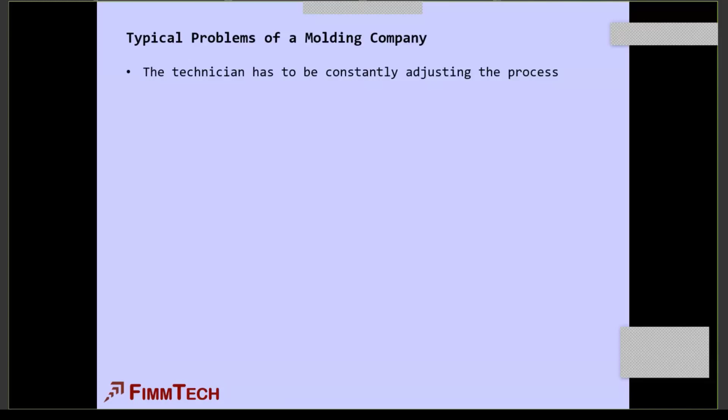Technicians constantly adjust the molding process. Parts have to get sorted out at the machine, sorted out by cavity. Don't tell me you guys don't know this. Sometimes cavity 4 is the one that's bad, so you have to sort it and throw it away. Measurement frequency is very high. Possible customer returns affect your reputation. You have to rerun the parts. Tool engineers get frustrated because they have to add steel to the tool.

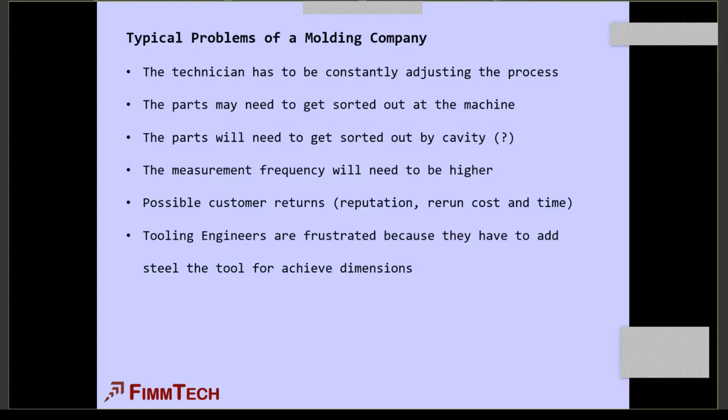These are only some of the problems. They had the tool done correctly, but then you said no, this part is now too big. So they change the steel, but then you have to go back and weld it. Some typical things: parts were good, CPKs are acceptable during qualification. So you qualified the mold, fantastic, 1.67 CPK. Now you go into production, and the CPK is like 0.97. What happened here? So all these things are typical problems on the production floor.

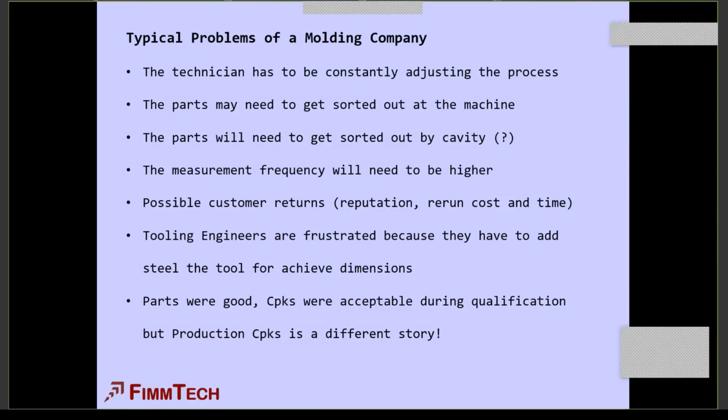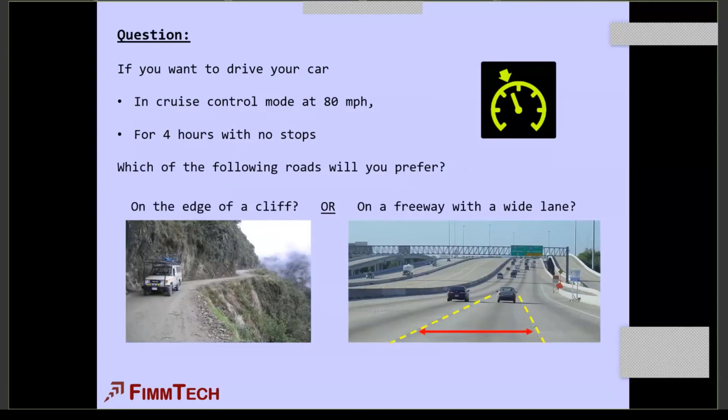Simple question: if you want to drive your car in cruise control mode at 80 miles an hour with no stops for 4 hours, which of these roads would you prefer? The answer is very simple. Do you want to drive on the edge of a cliff, or do you want a nice wide freeway like this? Of course the answer is obvious. You need a nice wide freeway so you can have carefree driving.

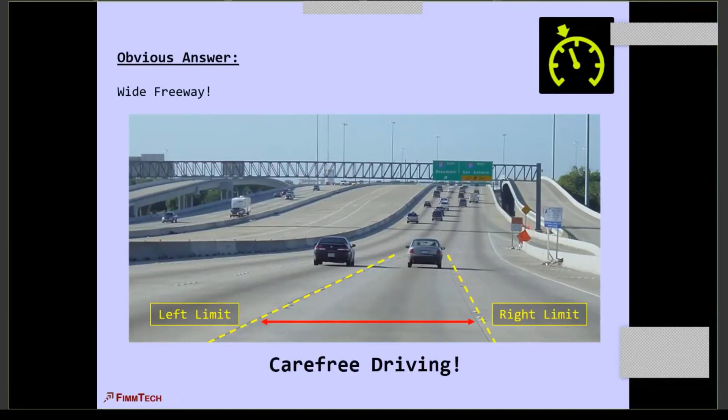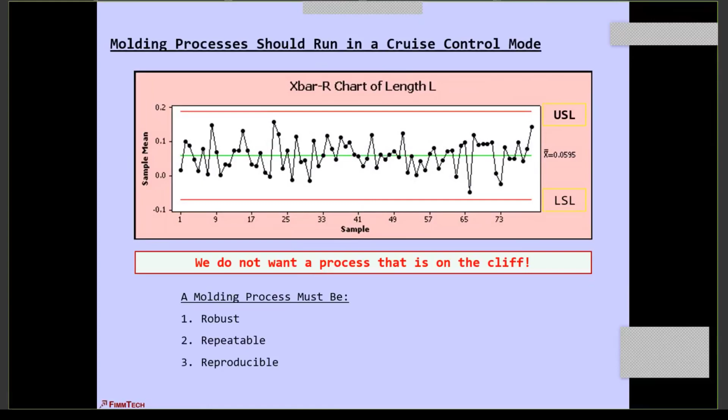There's your left limit, right limit. You get a phone call, you want to drink water or something, you waver a little bit, you're still going to be okay. So the choice is always having a nice wide freeway for cruise control, and I say molding processes should also run under cruise control mode and have a nice wide freeway. We do not want a process that's at the edge of a cliff. Therefore molding processes must be robust, repeatable, and reproducible. All three R's are extremely important.

Now, having said that, if the process is on the cliff, you're going to see all those problems we talked about. So robustness is one thing I mentioned, the process should be robust. That means the process should produce all the parts under normal variations in the production environment.

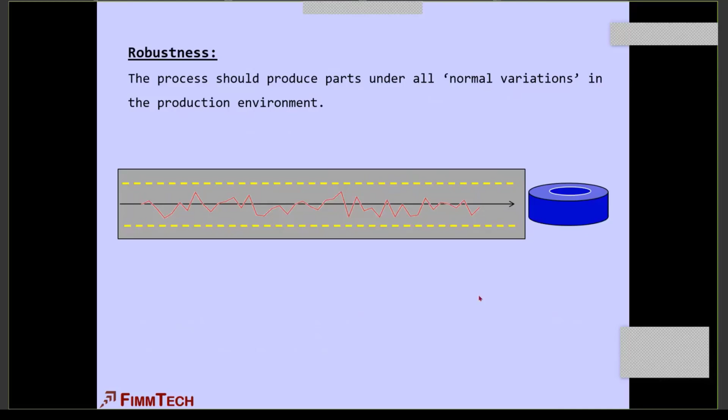If you look at what it takes to mold a part, there's a certain path to that. Each of these things is going to have variations coming from different locations, the machine, the personnel, the process, and all these things. Each of them are going to have their own fishbone diagrams. There's going to be variation in process, variation in the measurement systems - that's why you do gauge R&R - and variation in the viscosity of the material. So all these things are going to happen, and they're all going to have their own fishbone diagrams.

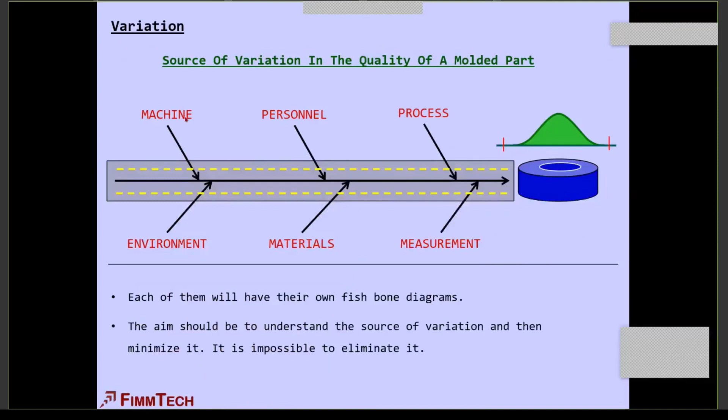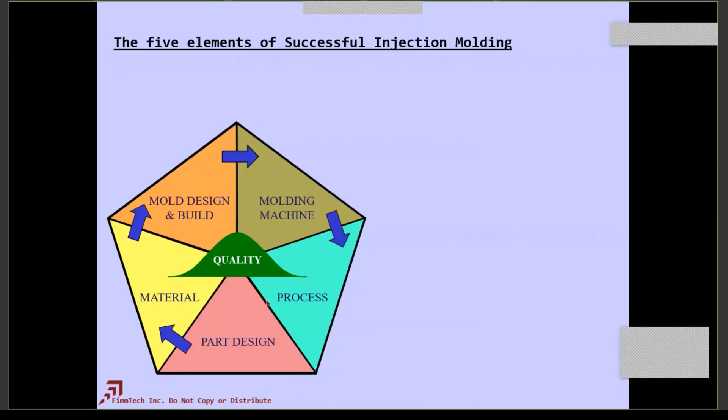Now, apart from this variation, please also remember that to come up with a good molding process, there are 5 elements that are important: part design, the material, the mold design and build, the molding machine, and last is the molding process. All these elements are pre-production or pre-molding, and they're also important. It's like a relay race - all the runners in the team have to run fast enough to win the race. This is very important to know.

So if you look at the aim of a molding operation, what do you want to do? You want to mold parts consistently. You want to mold all the parts that meet all the quality requirements, and you want to run an efficient process.

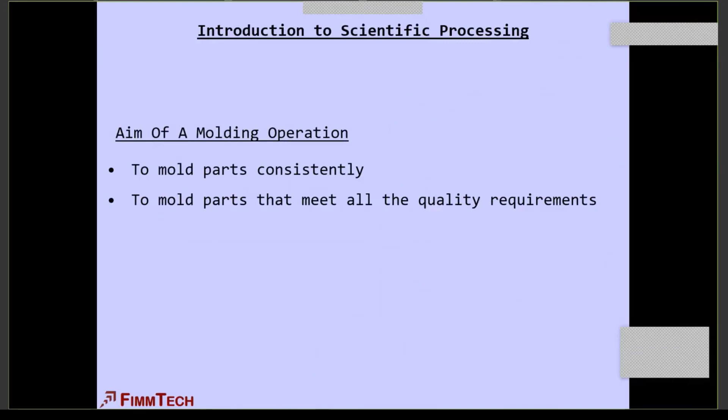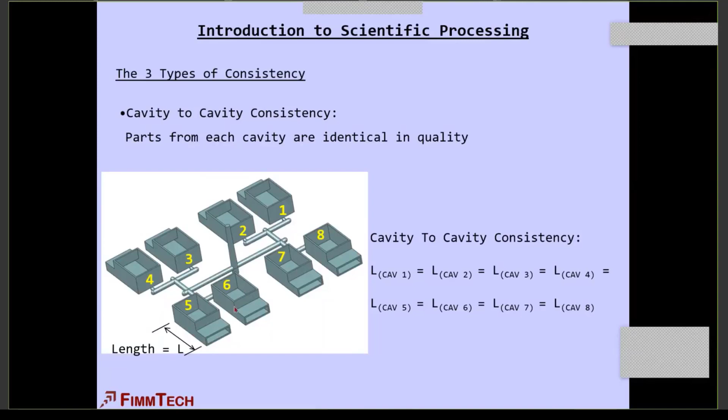Consistency - there are 3 types. The first one is cavity to cavity consistency. Second is shot to shot consistency, meaning every shot has the same dimension. And then you've got run to run consistency.

That means you mold 100,000 parts, change the mold to something else, then change the mold back to the first mold. If the quality of the parts from this run and that run is the same - meaning the average and the variation in the first run is the same as the average and variation in the second run - then we say you've achieved run-to-run consistency.

This is the most difficult consistency to achieve for a lot of molders. Why? The main reason is the word I used sometime back: robustness. The process was not robust to begin with. It is not repeatable, it's not reproducible.

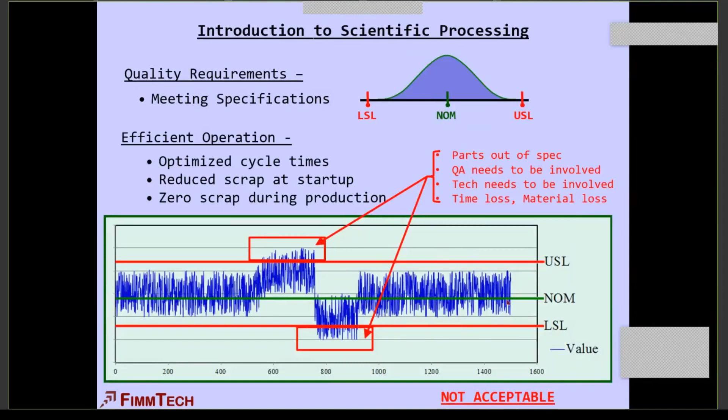Of course, you want to meet all the quality requirements. You want to have a good, efficient operation, and you don't want a process that runs like this. This is where you see a lot of loss in efficiencies, a lot of returns and so on and so forth. So something like this is not acceptable.

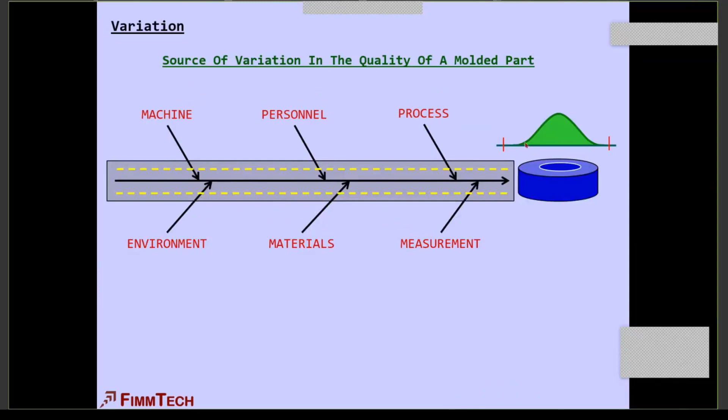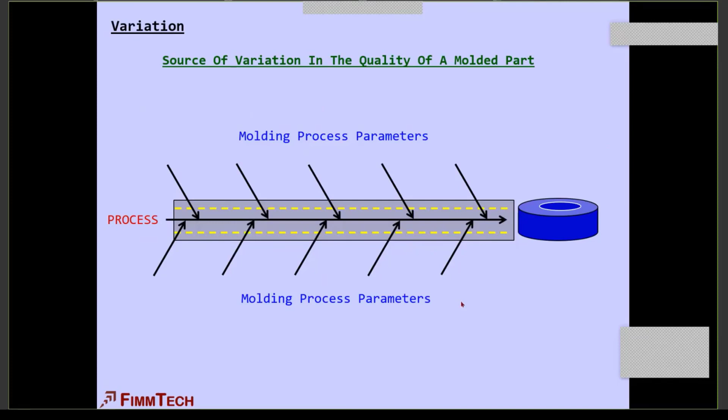So going back to this, the source of variation for a molded process part can come from various locations. However, we are going to focus on the process. So now if you look at the molding process, where is the variation coming from? A number of things, but we are now going to be talking about the process conditions or the molding process parameters. How many are there? I have identified them as 11 plus 2 molding parameters on the machine.

And 8 outputs. So these 11 plus 2 - I don't say 13 - because if you don't split pack and hold into 2, and a lot of companies don't split pack and hold, then you have 11. If you do split them into pack and hold, then you have 13 parameters out there. And decompression is there, it's a question mark. Again, I cover this in my 4-day class, I teach a whole 4-day class about it. So let's not look at this in detail, but I say it's 11 plus 2 molding parameters. Variation in this is going to give you variations in the quality of the molded product.

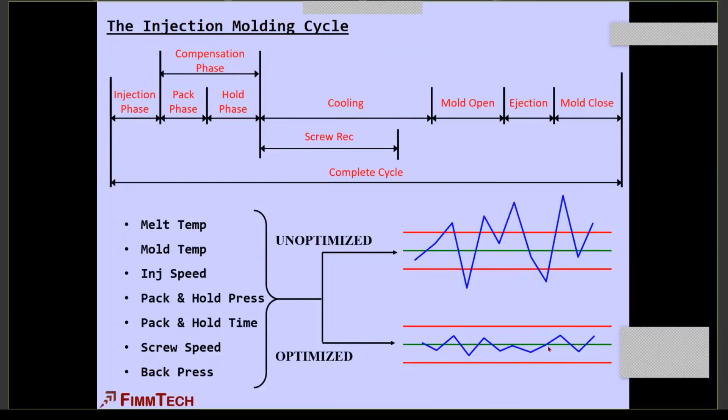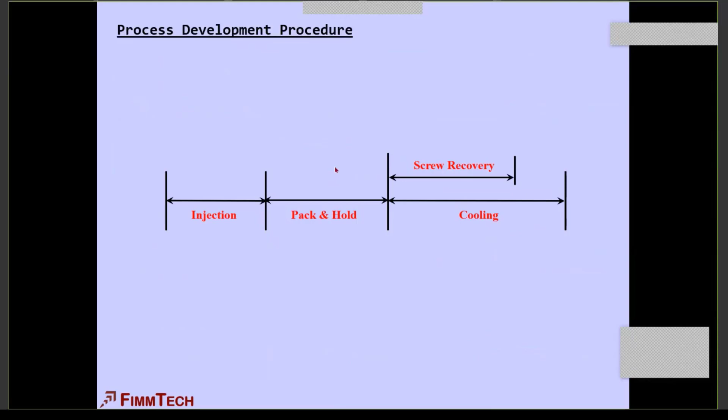What do molders do? The first thing they'll do is the melt preparation studies. I don't know if a lot of people do these things now, but it's something I've been teaching for the last 5-6 years - the melt preparation study.

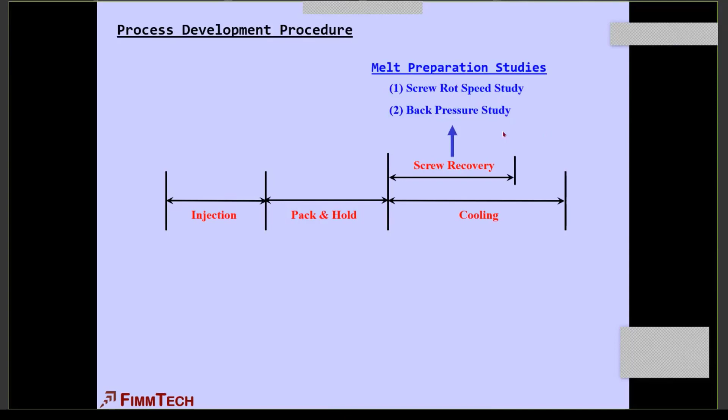So you do melt preparation, screw rotation speed study, a back pressure study for coming up with this part of the cycle. And then you get into the scientific molding side, or what I call the 6-step study. The only reason I call it that is because we know how many steps there are, nothing else.

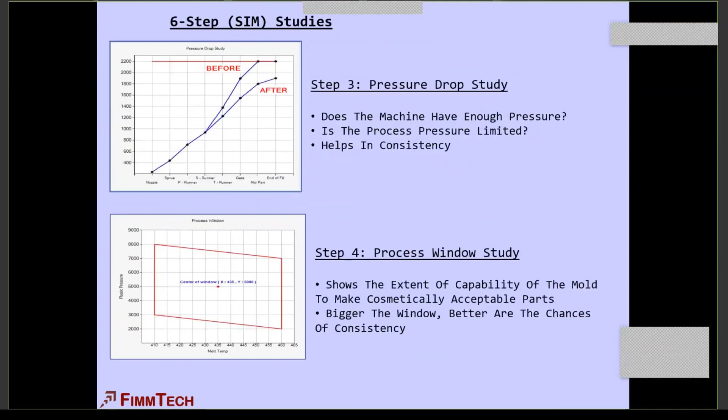The term scientific molding was coined by Mr. John Bozzelli and the folks at RJG. These are the 6 studies. People will do these studies and come up with the process. Here are some graphs from that: melt preparation study, the 6-step studies - viscosity, cavity balance, pressure drop, process window, gate seal study, and cooling study.

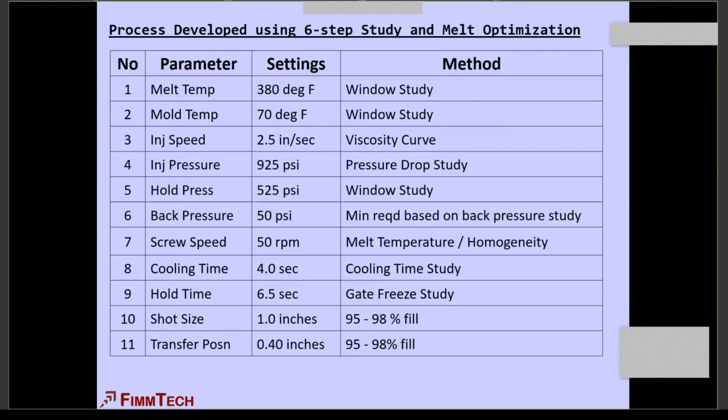So they do these studies and then they come up with the molding process, most companies. So here is the molding process that I've come up with after doing the scientific molding studies. Okay, good, so I have a process. So are we done? The answer is no.

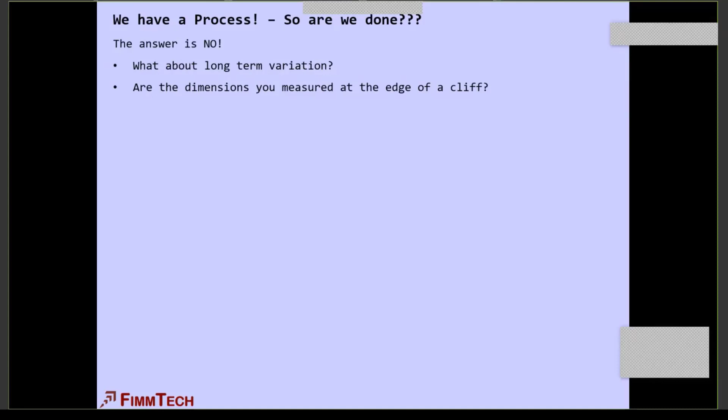Why is that? Because what about long-term variation? Are the dimensions that we measured, where are they - are they on the cliff? A lot of people will do a CPK study right there with the dimensions, but it is flawed because if you take 30 parts back to back and do a statistical analysis, chances are they'll be extremely consistent. But that is not the representation of your complete production run in the future, or the next one that you're going to get. So are the dimensions you measured on a cliff?

Are you going to be fighting dimensions and cosmetics at the same time? I'm going to give you an example of this. Are you setting realistic alarm limits? Alarm limits - very important. You say the cushion value should be plus minus 0.05 inches. Where do you get that 0.05 from? The pressure values should be plus minus 100 psi. Where do you get 100 psi from?

So there has to be some data-driven decisions you need to make, data-driven numbers you need to come up with. If there's a dimensional issue, what should I change out of the 11 plus 2 parameters? As an example, look at this.

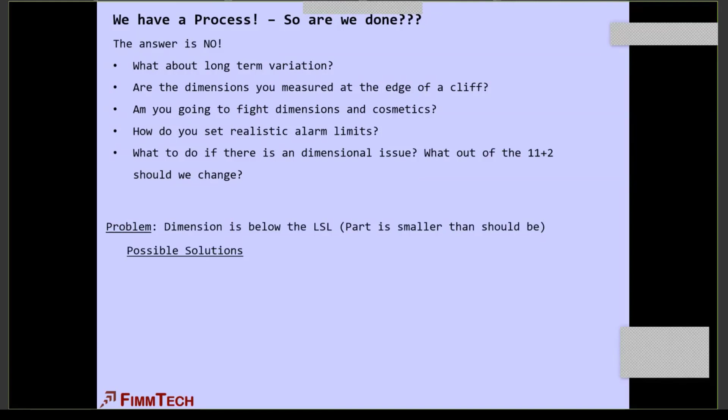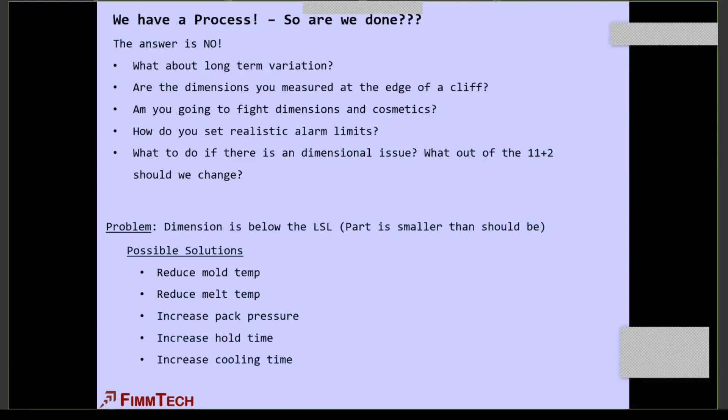The dimensions below the lower spec limit - so if you want to make a part bigger, increase the dimension of the part, then if I say go increase the dimension of the part, what will you do? Possible solutions are: reduce the mold temperature, reduce the melt temperature, increase the pack pressure, increase the hold time, increase the cooling time. All these things will, in theory, increase the dimension of the part.

And therefore we need to understand the effect of the molding parameters on the part quality - which one is going to give you the biggest bang for buck when you go change it. Is it melt temperature or is it mold temperature? There's no definite answer because it is part dependent, dimension dependent, and material dependent. All these answers are correct, but they're all dependent upon the particular things I just told you about.

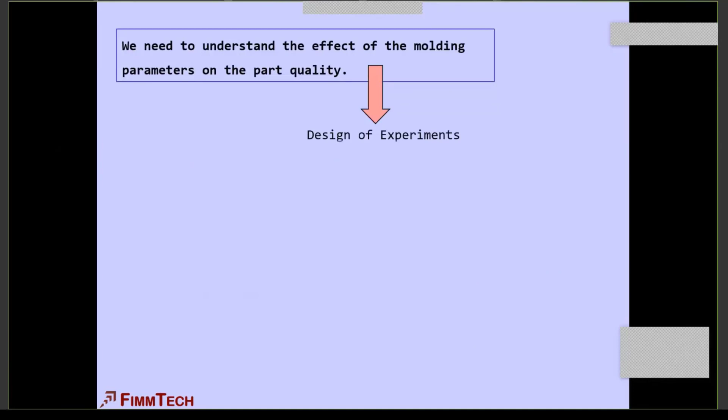So we need to understand the effect of molding parameters on the part quality, and that is what design of experiments is. We play with the process - what do we do? Let me go change the cooling time and see what happens. Let me go change packing pressure and see what happens. So we play with the process.

Playing with the process and systematically finding what the effects are is basically what is called design of experiments. So if you look at a definition, it is a systematic set of experiments that involves changes to factors of the process to study and record the corresponding effect on the responses. So that is what a DOE is.

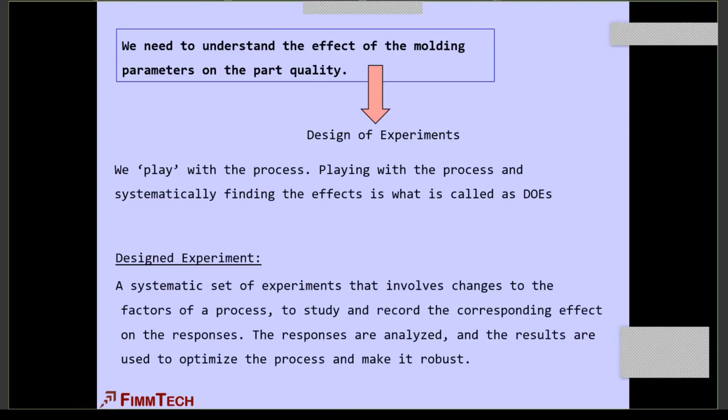And for those of you who have studied DOEs, you probably already know this. Afterwards, there's the first part, then they used it when the war broke out - they started using it in the war to increase yields and all that stuff. And then you got into Mr. Deming, who started implementing the quality systems and all that. And now, of course, we are using it more and more.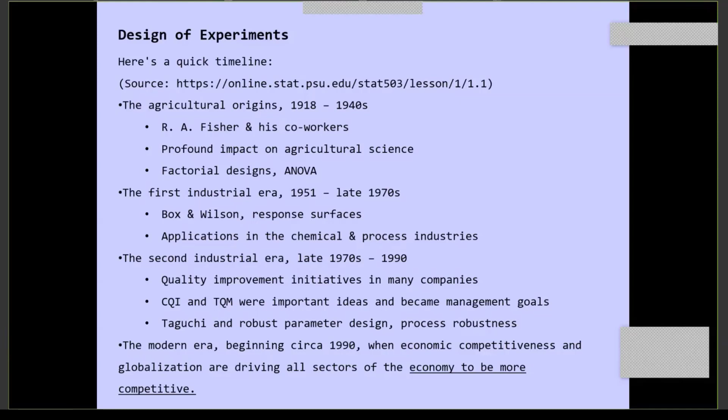One of the reasons the COVID vaccine is getting delayed is not because they're not able to make it, but the testing is going to take a long time. How do they test it? They go through a lot of DOEs. They have to go through a lot of factors, a lot of variation, underlying conditions and all that stuff. So DOEs have been used in several industries.

My favorite wine is the Meiomi Pinot Noir. So if any of you all want to send me a gift, that's what you need to send me.

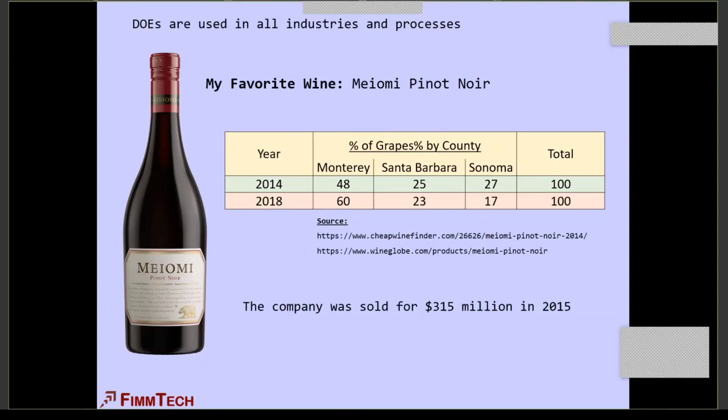If you look at this wine in 2014 and 2018, I got this from the websites. You can see that they're all blended differently from different grapes. Why did they do that? In order to maintain the consistency of the taste. Once you have that consistency, once people start liking that taste, they need to keep on maintaining it, and that's what gives them success. In fact, when I was doing this research, I found that the company sold just one brand of wine for $315 million. So that's a lot of money. But they use this in the wine industry, food industry, everywhere.

So why don't molders use DOE so often if it's so useful? Because of the misconceptions. Number one, they say it's too complicated, that one needs to understand math and statistics. Then they say it takes a lot of time to perform these studies, there's a lot of waste of material and resources, and it takes a lot of time to measure all the cavities, all the dimensions, or all the runs.

Then I need to learn how to use software and interpret the results. Minitab is a fantastic software, and if you guys know how to use it, more power to you. But I always say, for what we want to do, it's like taking an airplane to the grocery store. You want to go to the grocery store, you don't need to go by airplane. It's just like that. So use something simple.

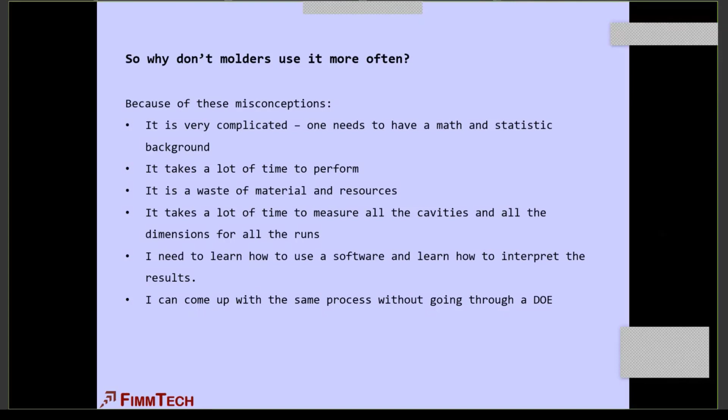Then other people say, I don't need to do all these DOEs because I can come up with the same process without a DOE. Okay, you can come up with the same process, but there are a lot of other benefits that you get, which I'll talk about very soon. So for all these reasons, people don't do DOEs.

So let's go into molding now. Effect of packing - if I want to study the effect of packing pressure, if I increase the packing pressure from 4,000 psi to 8,000 psi, the dimension goes from 1.726 to 1.735. What does this mean? An increase or decrease in the packing pressure by 4,000 psi increases or decreases length by nine thousandths of an inch.

So what did we do here? We systematically performed two experiments, one at low pressure and one at high pressure, and looked at the dimensions and plotted the results. This is a dotted line because this relationship can be anything - there's always a curvature there. If I have time we can talk about it, especially in molding, because there's always a physical limitation to the tool. You cannot keep on packing it and expect dimensions to keep increasing. So this relationship can be anything.

So what have we done? We have done two experiments, one low and one high. But I say this is the most basic DOE, because you've systematically done these experiments.

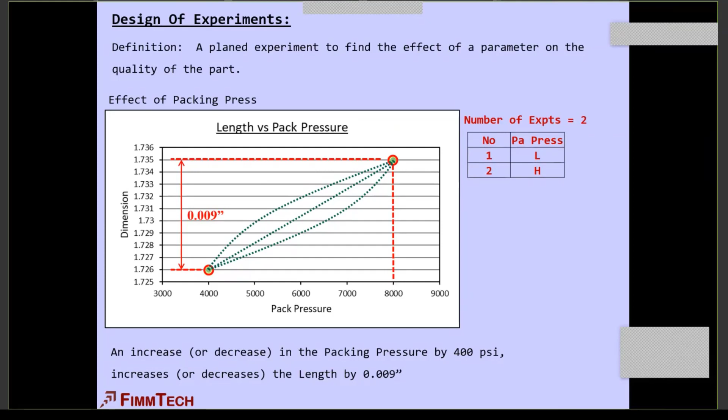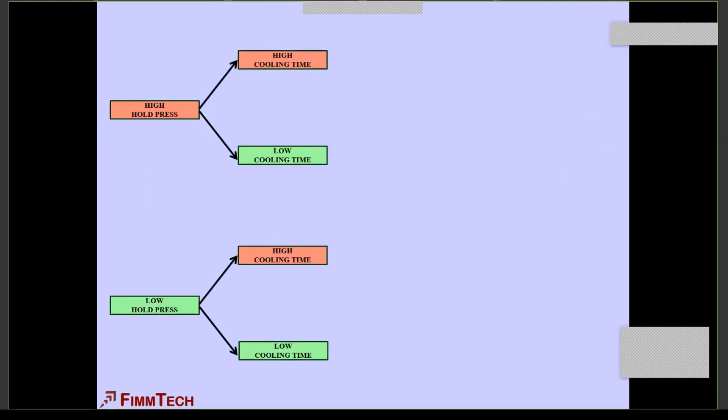Then I say I want to also look at the effect of melt temperature on this. I did packing pressure first, so I did melt temperature second. So what do I do? I repeat the same high and low experiment at the high and low melt temperature, so I end up with 4 experiments. Then I say I want to add mold temperature, so now I add another 4 experiments because I'm repeating the same 4 at the high and low of the other one. So I end up with 8 experiments. If I add one more factor, it becomes 16 experiments. So as I keep increasing the number of factors or processing parameters, the number of experiments keeps doubling because I'm studying low and high.

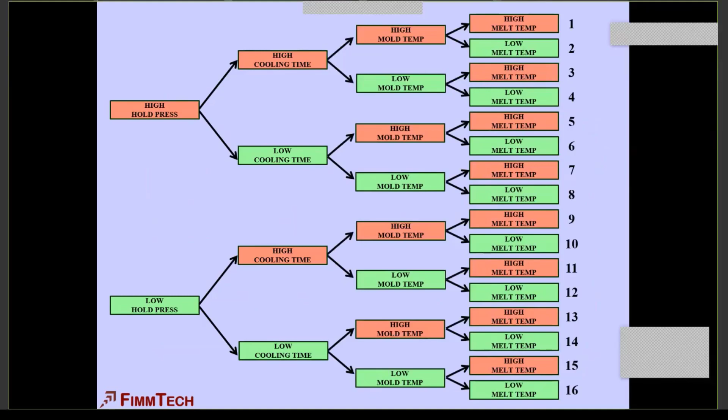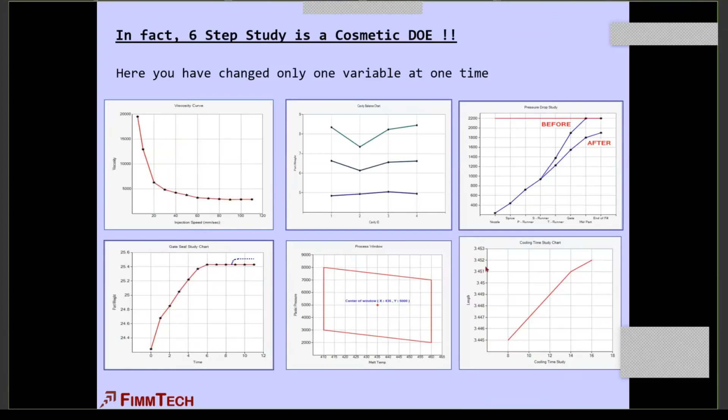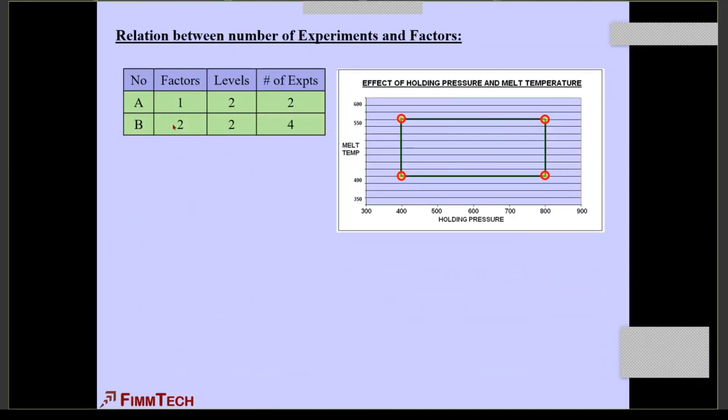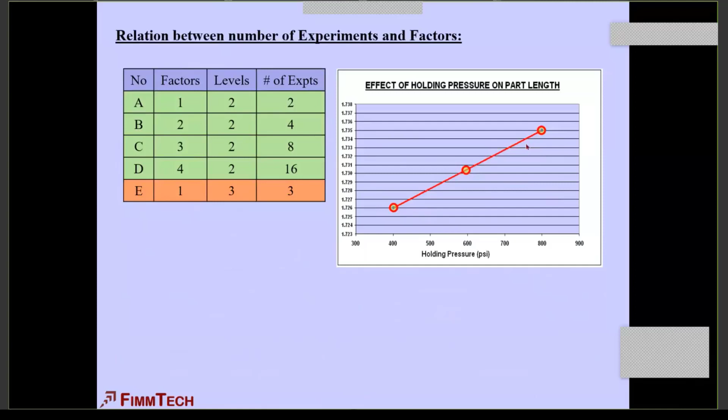But here's the problem: if I've got 1 factor and 2 levels, I end up with 2 experiments. If I go to 2 factors, it becomes 4, then 8, then 16. If I decide 3 levels—low, medium, high—with 1 factor, I get 3 experiments, and with 2 factors, 9 experiments. As you increase this, the number of experiments you need equals the number of levels raised to the number of factors. That's a formula. If you calculate with 13 factors at 2 levels, you end up with 8,192 experiments, and at 3 levels, almost 1.6 million experiments, which is impossible to do.

That's one more reason a lot of people don't do DOEs in industry. They say there are too many factors in injection molding. But there are only 11 plus 2. I've heard people say 30 factors, 40 factors—no, it's just 11 plus 2 factors. If you say there's too many factors, that's one of the reasons people don't do DOEs. But running that many experiments becomes an impossible job.

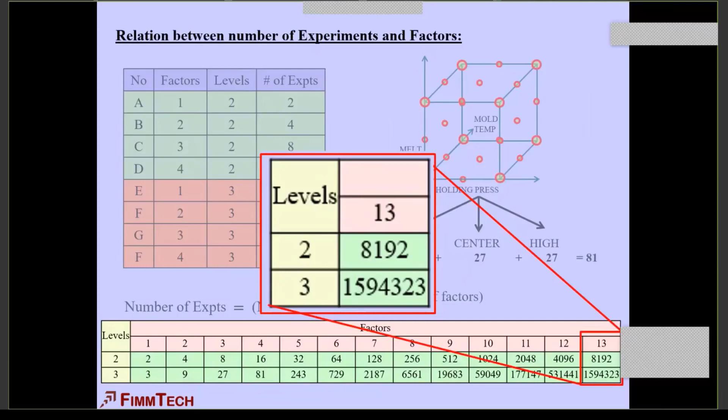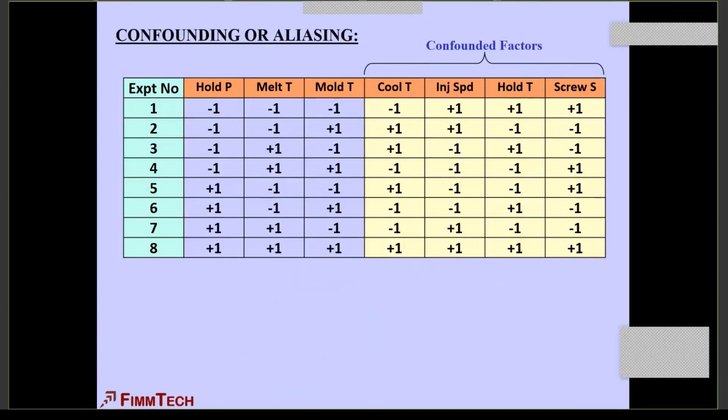So what do you do in that case? I'm not going into details, but this is where our friends the statisticians come in, and people like Ravi who do data analytics come in and say there's something called orthogonal arrays and something called interactions. We take all these things and do confounding, and instead of running 8,000 experiments, you can run just a few, and those few predict the quality of your part. That's what statisticians do. I won't go into details due to time, though I teach some of it in my class, and if you want something detailed, Ravi can come and teach that for you guys too.

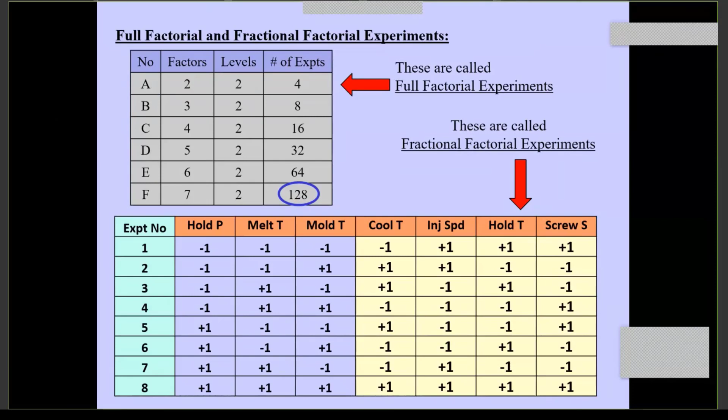They do fractional factorial experiments, and there are several models for DOEs—Fisher methods, the Taguchi methods, and so on. You can do this analysis and come up with the factors that are most important. Minitab is one software you can use, and Nautilus software, which I made very simple, I'm going to show you guys. But then how do you select the factors? I'm sure you're interested in this—how do you select the factors, since I can't run that many experiments.

First, understand the molding side of it—everything comes from the PVT diagram, a pressure-volume-temperature graph. In injection molding, you're taking plastic and melting it—giving it temperature, melting it, then pressurizing it and injecting it into the mold. As it's injected inside the mold, the part is cooling down, so the change in volume is the shrinkage. Anything affecting the PVT is extremely important in your DOEs. Mainly it's pressure, volume, temperature—and volume is related to pressure also. All these things are, of course, related to each other.

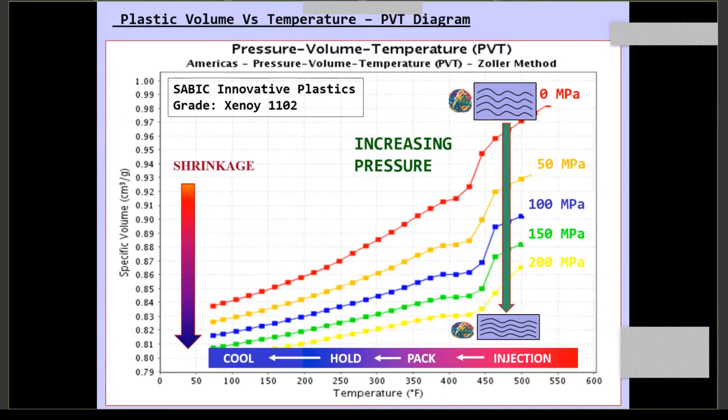Pressure, volume, and temperature are important. When we do our scientific molding studies, we start looking at our 11 plus 2 factors. In this case, I've made only 11 factors to keep it simple, and I've put shot size and transfer together, so you see them as 10 factors here.

How do you select a shot size and transfer position? It's fixed at 95 to 98% fill. So do you use it for DOEs? No, you don't use it for DOEs because you want to keep that percentage fill the same.

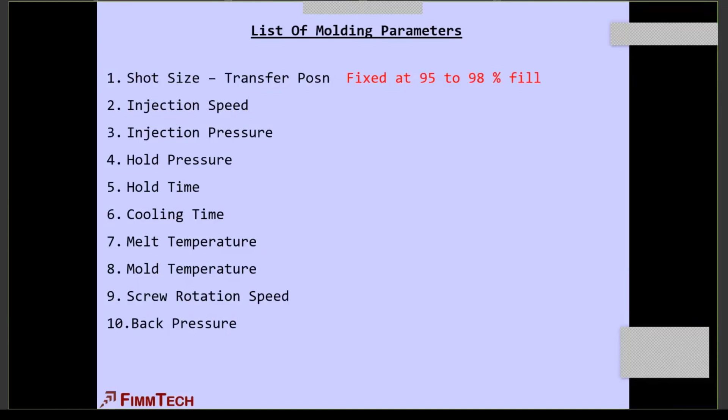How do you find out injection speed? You did a viscosity curve and you selected injection speed. So do you want to go slower? No. Faster? No, right? You set your injection viscosity curves there, injection speeds there.

Injection pressure on closed loop machines is fixed. The machine takes what it wants from what's available to it. So if you change that up and down, it's not going to matter.

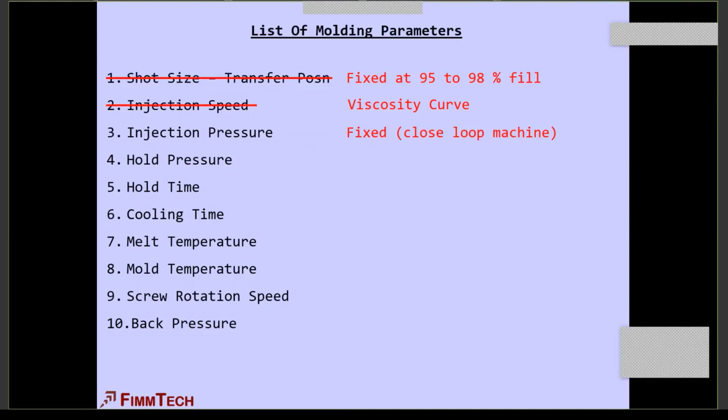I've called this the holding pressure, as this is actually pack and hold pressure. Yes, use this for DOEs.

Very important: holding time is fixed for cold runner systems. For hot runner systems, you may have to use it. Cooling times, use it for DOEs, yes, because it's a cooling rate.

Melt temperatures are yes for amorphous materials. Mold temperatures are yes for crystalline materials. Why is that? We'll cover that in the class.

We've set our screw rotation speed based on the melt temperature study, looking at the homogeneity. And we also set our back pressures based on a scientific back pressure study. So this is based on data, we've set those numbers there.

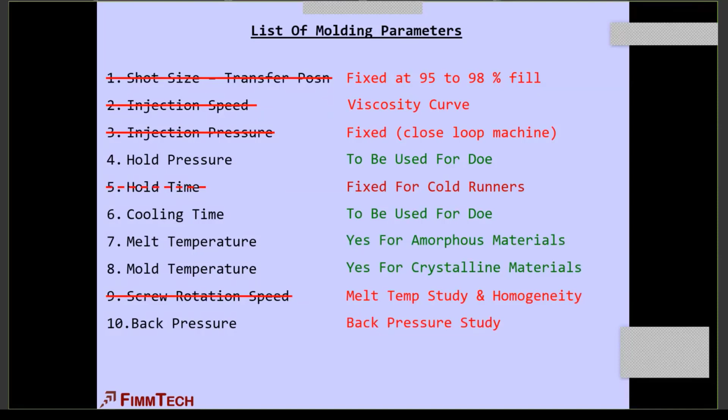The factors you want to study for DOEs are basically always your pack and hold pressures, always your cooling times, always your melt or mold temperature. If it's in olefins, you may have to use both. May, the important word is may. And it may be holding time, I'd say, for a hot runner system.

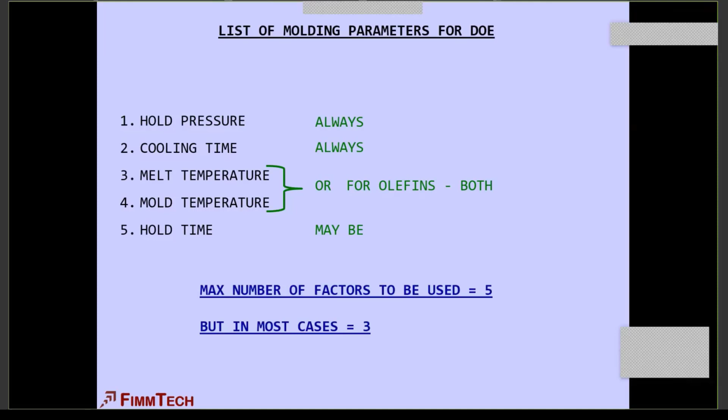In most cases, if you're using a cold runner mold, 3 factors is more than sufficient. You don't have to do all the 1.6 million or 8,000 experiments. You can get away with running 8 experiments, and that's going to give you all the low-hanging fruit that you need.

Is injection speed important? In some cases, yes. It'll have to go on a case-to-case basis, but in most cases, no.

Is back pressure important for doing DOEs? Absolutely not. Why is that? Because the effect of back pressure, let's say on a scale of 1 to 10, is 2, whereas packing pressure is 8. So what do you go change? Packing pressure in that case.

Having said that, I'm going to quickly go to my software. It's going to be very quick. There's a nice 23-minute video on my website, that's a short version, showing how powerful my software is. But I'm going to go to the software here and show this to you guys.

This is my software. There's a home screen, a database here with all 3 databases. On the project, you can see all these icons: melt preparation studies, 6-step study, the scientific molding studies, plastic process sheet, and so on and so forth, of which I'm going to go into the DOE.

I'm going to show you how easy the DOE portion I've designed here is. You can see in the DOE, the first window has a drop-down list. You select your factors: cooling time, melt temperature, holding pressure. Of course, you can type your own in here. But notice this, I only have 5 factors, you cannot add more than this.

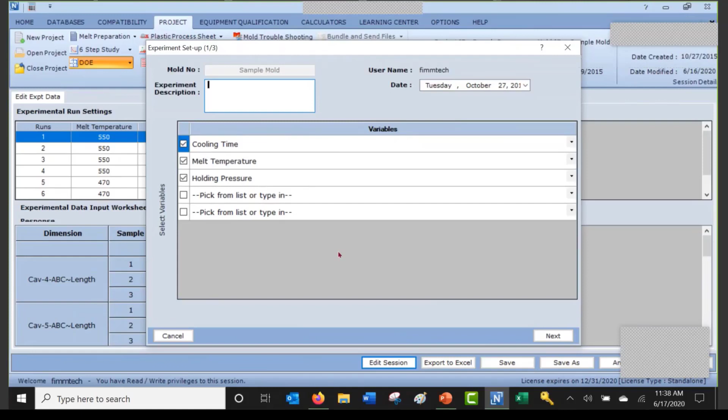Is it easy for us to put, say, all the 11 factors here? Yeah, but we don't need it. I want to keep it simple for you guys. Okay, this is step number 1.

Step number 2: put in your highs and lows numbers. What do you want to study? I want to study holding pressure from 800 psi to 1200 psi, because when I did my process window, below 800 I got short shots, above 1200 I got basically flash. So these are my physical limits here. I'll tell you what this precision number is soon.

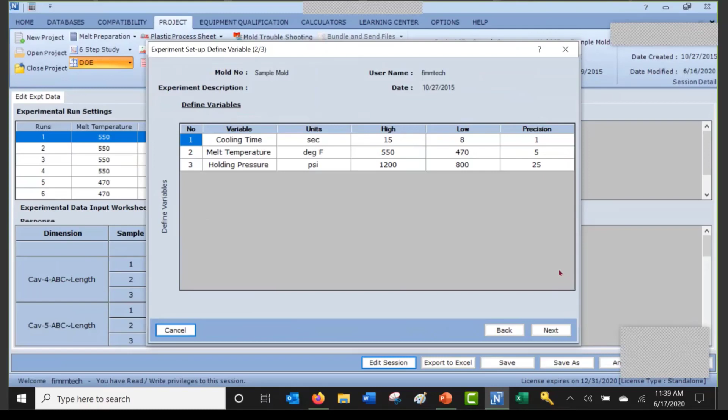So that's step 2. Step number 3: put in all the dimensions that you want to check, your nominal values, your tolerances, sample sizes. This is not statistical analysis, very important. You just need to check 3 to 5 parts, that's it, you don't need to check 30 parts.

Okay, if it's a family mold, select to which part this dimension belongs to, and you simply click on worksheet. That's it. That's how simple the software is, guys.

It spits out these 8 experiments here. You can see there's 8 runs. We do full factorial experiments, 3 factors, 2 levels, so that becomes 8 experiments. You run one confirmation run, and these are basically the 8 experiments that you run here, plus 1, 9.

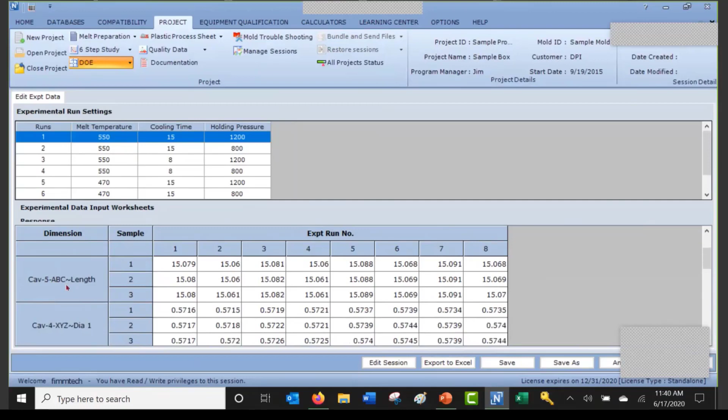Go to the molding machine, run your parts, collect all the data, put all the data here. You can also collect an Excel sheet and dump it in here if you want—actually preferable. Experiment 1 through 8, sample 1, sample 2, sample 3 for all the dimensions you see here, and then you simply come in here and click on analysis. That's it. Like I said, I've achieved my goal of making life simple for the molder.

So what does it give you? I'll tell you the most important. There's several tabs here on the top, and it'll tell you the most important tabs.

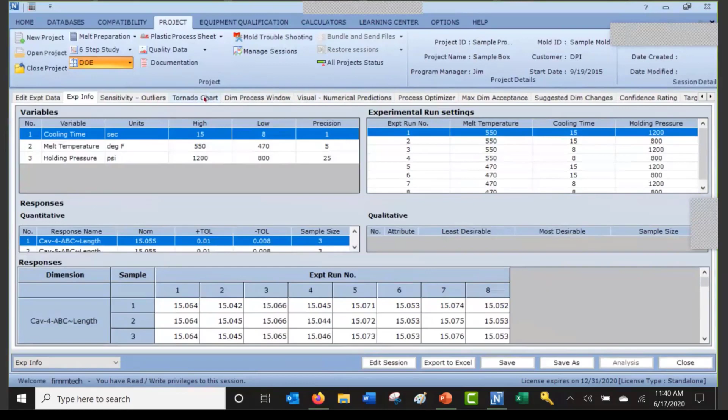Tornado chart—what does it tell you? The most important factor for that dimension, that cavity. See, it says here C, holding pressure is the most important one.

So now if I tell you go change the dimension of the part, what are you going to change? You're going to go change holding pressure. Are you going to touch B, cooling time? No, because cooling time makes no difference on that part, so don't even touch the cooling time. So now you're making data-driven decisions based on this.

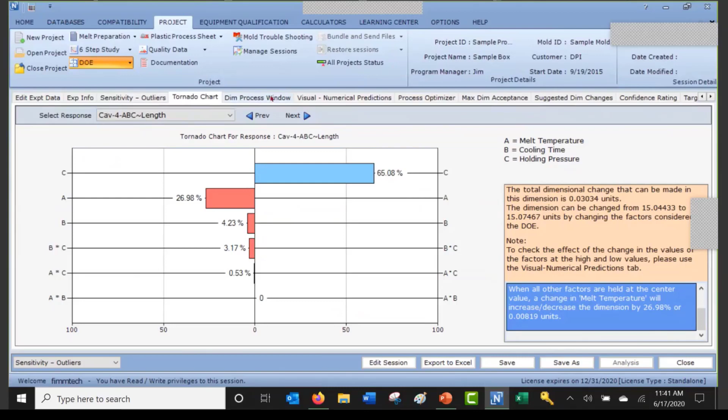Then you come to the process windows. Because we know melt temperature and holding pressure are the 2 that are important, right? This is my cosmetic process window. That means inside this, I can make good parts. Below 800, I got short shots. Above 1200, I got bad parts.

So now if I want to hit nominal on this dimension—this solid green line that you see—if I click on that, anywhere I click, it tells me at 530, 962, and 11.5 seconds, I will hit nominal on that dimension. This is your data, this is your machine, this is your measurement systems. The software is only analyzing it.

How accurate is this? I will show that to you very soon. So now that means what? I can come in and draw this window inside this, which is the dimensional process window, inside which you'll always mold parts that are to spec. So if I maintain my temperatures between 486 and 544, and 834 and 1060, I'll always make parts that are going to be to spec, and that becomes my dimensional process window.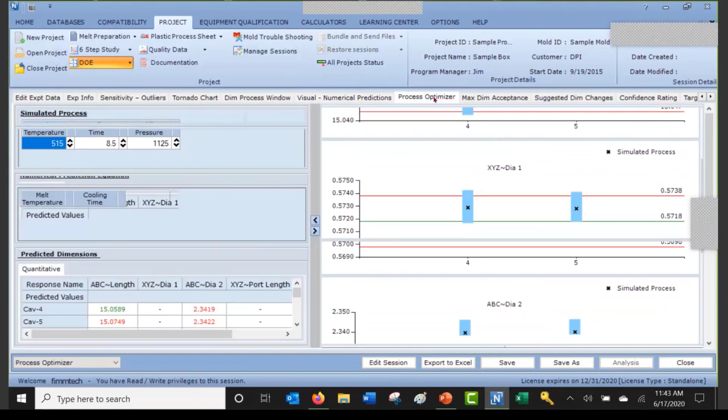So the software, you can come in and say, okay, tell me the best process. We can also optimize based on the dimensions and the cavities that you select. It tells me my most optimum process where I can come to nominal here—it tells me basically that my most optimum process is 550, 10, and 1025 PSI. So we also give the most optimum process, but okay, that's optimum process.

What about these parts here? Okay, 550, 15, and 1025—we have something called suggested dimension changes. Coming here, 550... right, 10 seconds—sorry, 10 seconds—and 1025.

See, now it tells me diameter 2 is 15.6 and 15.8, so about 16 thousandths away from nominal. If I go change the steel on that cavity by 16 thousandths, I will again hit nominal on that dimension. The software also tells you how much steel you need to change.

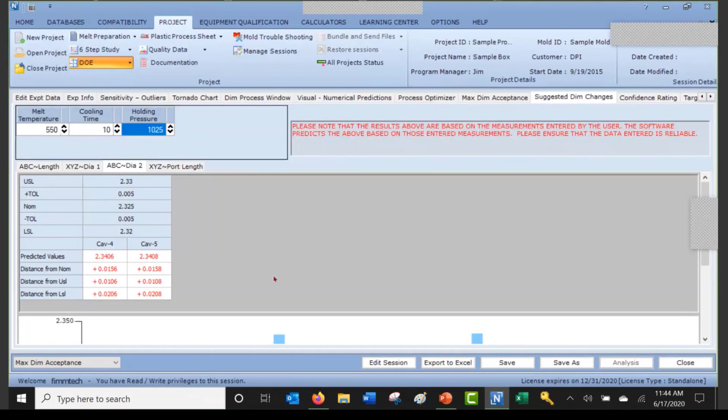There's several things you can do with the software. It tells you your process windows, it can help you find the most optimum process, and it can simulate the process. That's how you come up with a preferred process, and then you run with the dimensions and see what the windows are.

Once you have the molding process, you can record it in the plastic process sheet, and under compatibility the software will also tell you. Selecting that here, when I display compatibility, the software will tell you which machine, other than the one you ran it in, will fit as far as percentage shot size and residence time go. But that's one tab. The second tab is process machine compatibility.

So machine 5 is where I came up with a good, robust process based on scientific molding and DOEs. Now I can predict and give you the process for every other machine in the database. What's red is not acceptable, what's green is acceptable. So if I decide I want to run it in this H machine, I select H, click go, and the software comes up with a process sheet for that machine where you've never run this before—all based on calculations.

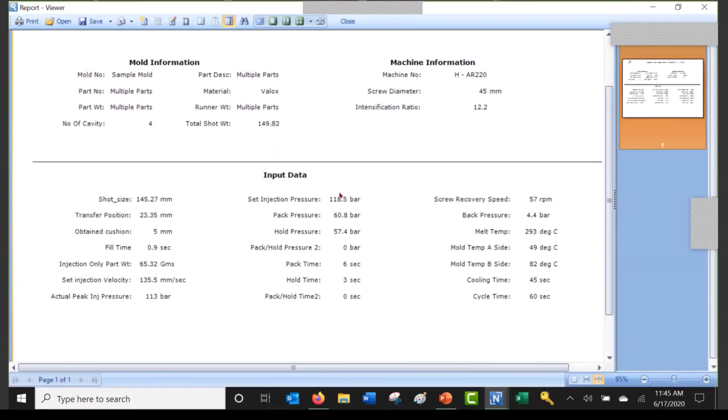So this is a process sheet. How did you come up with this? You know the process is robust because you've done the DOE on this. Most importantly, it takes me almost 1.5 hours to show you the software, but there's a very quick 23-minute video—please look at it on the software side of things.

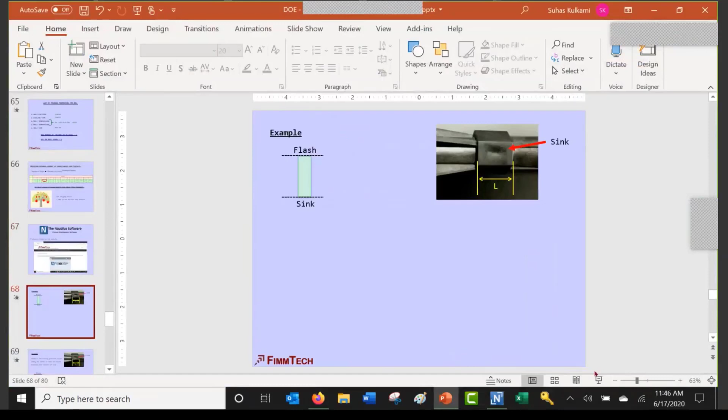But I want to get back to my presentation here because I want to take some questions also. So a good example is this.

There's a company that was always making bad parts, always had issues with customer returns. So what did I do? This is a part that had sink and the length was important. So first I did a process window of sink and flash—decreasing the pressure would bring the parts in spec, but would increase the chances of sink. This is how the process window was.

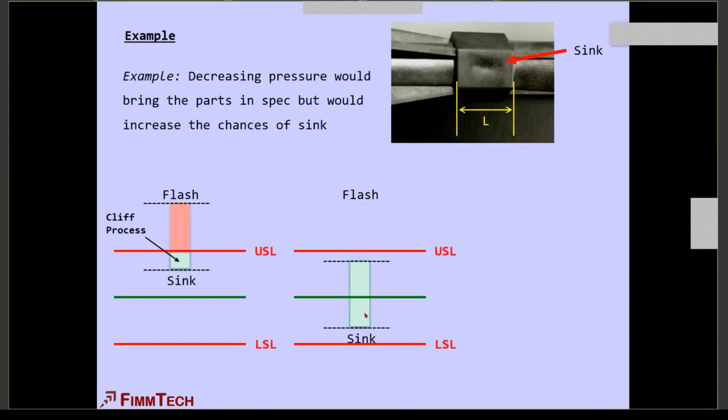So how did I know? Only because I ran the DOE in this case. So what do you do? You center the process, center the steel, based on the DOE data. You choose a robust process with a nice wide window on both sides of your steel, and now you have a good robust process. In fact, there were 3 dimensions the customer literally stopped measuring after this, whereas before they would always get rejects from their customers due to sink or dimensions out of spec.

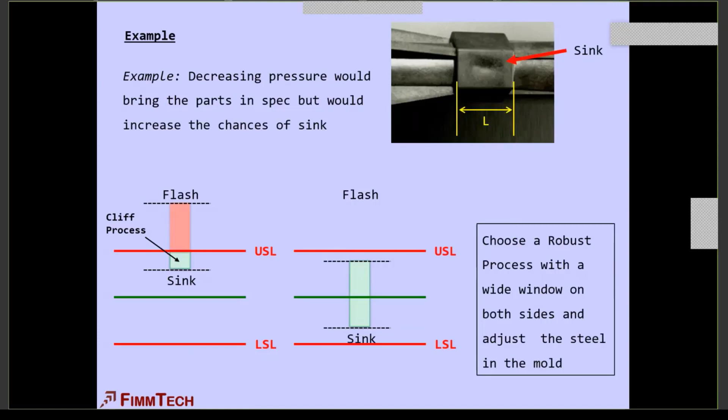How good is my software? Here's from one of my seminars—I get this every single time, but this is the one I actually made the PowerPoint for. You can see the actual and the predicted. We ran this—run number 9, which is the confirmation run. If you look at the actual and the predicted, the difference is almost 1 thousandth, actually less than 1 thousandth—that's rounded up. That's how good we are. Our software predicts the dimensions for you.

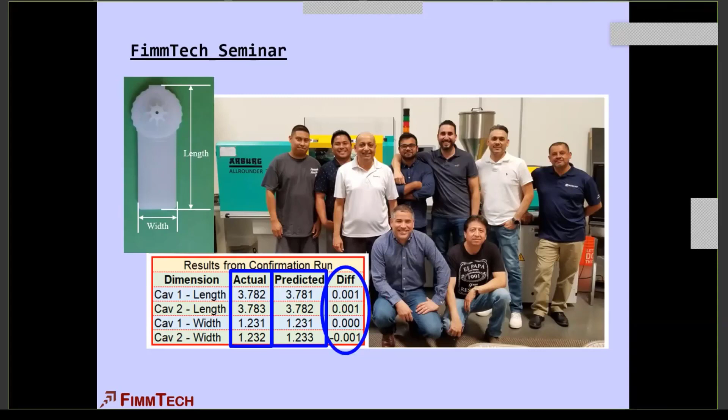Another customer, an irrigation company, saved $100,000. They saved a lot of money on this by doing DOEs. They found out they could run the parts much better, have reduced inspection, all that stuff. Without doing a DOE, you never know how fast you can run a mold, or where the dimensions are and how soon they can go out of spec.

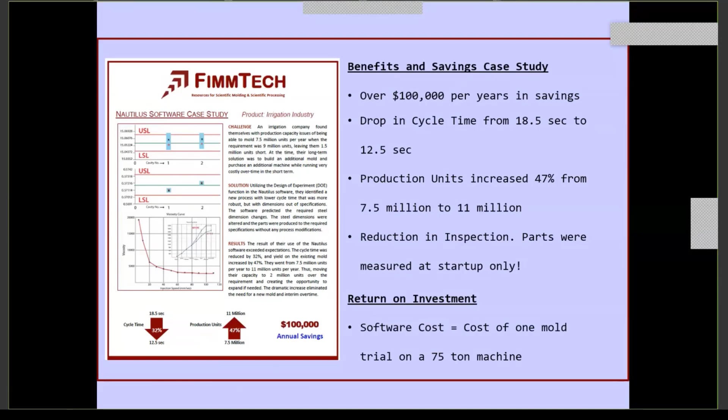The cost of the software, by the way, is equal to the cost of one mold trial on about a 75 ton press. It's $2,000 a year. We constantly add stuff to it, and that's why it's a subscription-based model, just in case you guys are wondering why. There's lots of stuff that Ravi and myself are working on, very cool stuff that should be coming up soon.

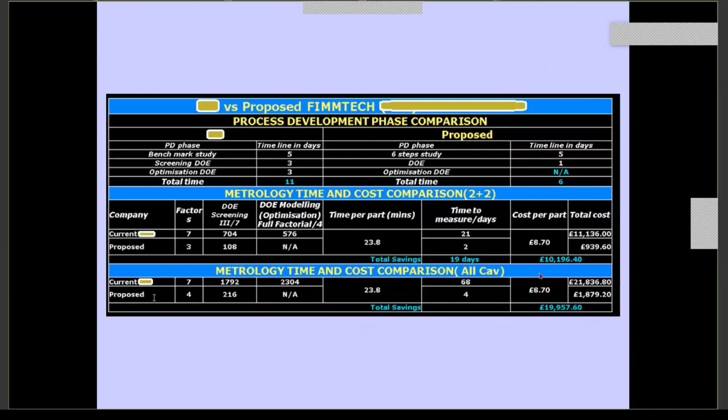A company in the UK ended up saving just on inspection. They saved almost 30,000 pounds. You can see this number right here.

I always do a 2-stage approach. Scientific molding is one part of it, and then the second part is design of experiments. I highly suggest you guys do these things. These flowcharts are available at no cost, for free. So send me an email, I'll be more than happy to send you this information.

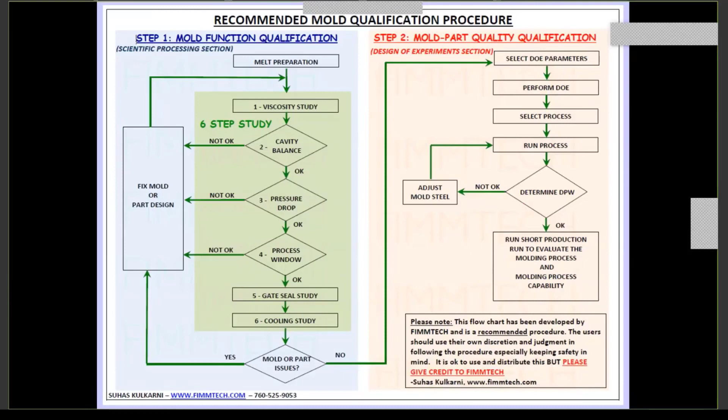One more thing I want to tell you: there's fantastic technologies out there, for example pressure sensing technology. But again, if you don't have a good, robust process, those technologies will not be useful for you guys.

I think this is great stuff to maintain and monitor your processes and look at the parts. So I think if you're going to be using this, you guys should also be doing DOEs. It's very important to set alarm limits. How do you set alarm limits? This should all be based on data.

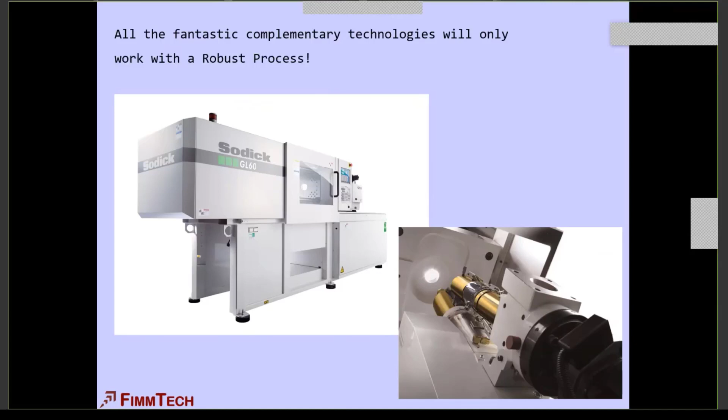You may have the world's best machine out there. You might have very good machines. I've heard very good things about Sodick machines. I have a customer down in Texas with a lot of those machines. They mainly mold small parts, but I know Sodick makes even larger tonnage machines, and I'm sure the technology transfers the same way. So you may have the really good machines, but you also need good processes.

So why don't molders do DOE very often? Let's look at this. Is it very complicated? It's not, it's very simple. I showed you, like 4 clicks and you have the analysis. Do I need to understand math? You don't need to understand math.

Does it take a lot of time to perform? Not really, 9 runs of 5 shots. Usually in 2 hours you should be finishing the runs, then do the calculations. Within 2 hours you should be running all the DOE parts. What about waste of material and resources? Yes, it is that amount you use, but if you don't do DOEs now, you're going to be wasting all that material in production, because you're constantly running to the presses and having bad parts.

It takes a lot of time to measure all the cavities. That is absolutely true, but there's a way I can tell you how to reduce measurement. We can talk about that offline, but there are ways. Yes, measurement is the one that takes the most time, but again with the small dimensions and all that stuff, I've got a way you can get around it, and I'll talk about that.

I need to learn how to use software. Is that true? No, just look at my software, it's like 4 clicks.

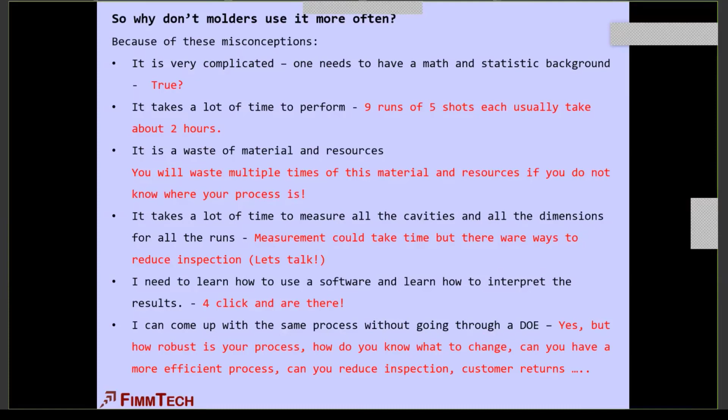I can come up with the same process without going through the DOE. Yes, but how robust is that process? What do you know? How do you know what you need to change? Is the process efficient? All that stuff, you will not find out until you do DOEs. One main important thing I've seen is that you have to have management support. Your management has to understand that DOE is a valuable tool. If management does not agree with that, it's going to be a challenge for you to implement that in your company.

Okay, I think I made time. So now, having said all this stuff, I just hope that you guys agree that DOEs are not complicated.